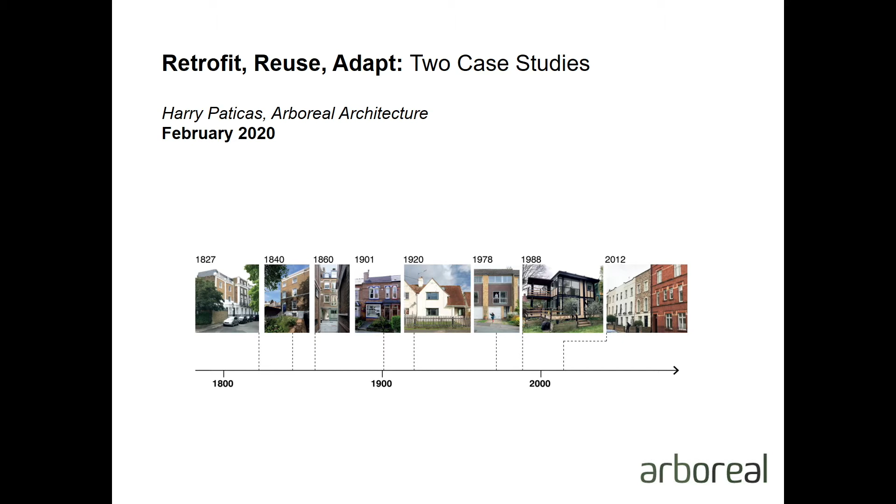So yeah, my practice is arboreal architecture, and for the last 10 years, I've been practicing deep retrofit, which is really a mission to upgrade the thermal performance and operational energy of existing buildings. And in a way, today I'm going to take you on a bit of a journey of my own self-discovery through trying to reach low-carbon solutions for the built environment. So I'm a co-director of arboreal architecture. I'm also a co-director of an organization called 1540. We're a collaborative of architects working on larger projects. I'm also the co-chair of a technical working group for the UK Centre for Moisture in Buildings, and that's on the Retrofit group. I'm a technical expert at the Sustainable Traditional Buildings Alliance, and I do recommend you look up their website and all the resources there, which are very useful.

I'm a RIBA architecture ambassador, and I've been working with schools and teaching children and engaging with schools. And that led to me founding RAFT, which stands for Retrofit Action for Tomorrow, which is a not-for-profit organisation. And I've just started working with the first school in Lewisham, and we are working to make the school zero carbon. It's a very, very exciting project. If anybody's connected to schools, please come and talk to me afterwards. So the other thing is that I'm a DIY retrofitting architect, which means I practice what I preach. And I've spent pretty much every Sunday for the last 3 years retrofitting my own house. So my house is one of the case studies.

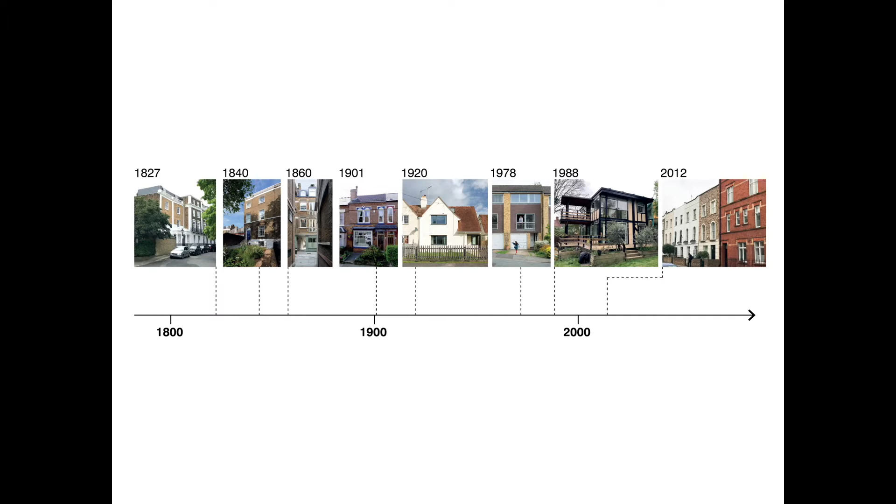So this shows a timeline of various projects that we've worked on. So this is chronological in terms of the types of buildings we've worked on. And really this slide is there to say that a lot of buildings need retrofitting, a lot of different typologies of existing houses, ranging from solid wall listed Georgian houses to cavity wall 1920s semi-detached houses. You'll see the one that says 1988 is a timber frame self-built house. That's one of the Walter Segal houses on Walter's Way. And we're about to start on site a retrofit of that house. And you won't believe it, or probably most of you will believe it, given the performance gap of most modern construction, but we're also working on a retrofit of a 2012 house, which is the one on the right.

So just very briefly, I'm going to introduce 4 projects. It's just 2 slides per project. And it's just to give you an overview of stuff that's actually been achieved in the past. So this is a grade 2 listed semi-detached house.

And we achieved the AECB silver standard, which is 40 kilowatt hours per meter squared for space heat demand, and achieved an air tightness of 2.1 air changes per hour at 50 pascals. So that's pretty good air tightness. It's had a listed interior. We worked with the Conservation Officer and Historic England to achieve that.

This is my mum's house. So again, we achieved the silver standard for this project. And we slightly reduced the level of air tightness, so we didn't tape all joist ends with air tightness tape to reduce leakage at joist ends. And we lost about 1 air change per hour for that. So we sort of started to build up over time a feel for how deep do we need to go, how invasive do we need to be to achieve what result.

This is a passive house, a certified passive house retrofit, EnerPHit, mid-terraced house in West London. And we only just scraped the target value of 1 air change per hour. It's quite challenging when you get down to the lower levels of air tightness on existing buildings. And yeah, that was quite a journey.

We've also worked on this rather wonderful building in the City of London, where we've achieved a pretty similar standard, the AECB silver standard, and just below 3 air changes per hour. That has MVHR. It's actually a 7-story building just next to St. Paul's Cathedral. Very jealous of that project.

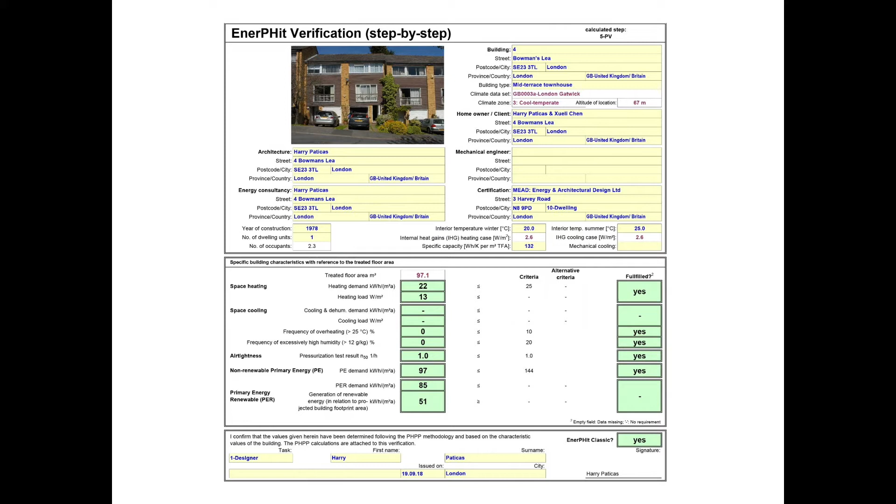So most of the layers of the house were stripped out before we moved in, so we did all the really nasty, dusty stuff before we moved in. This is the EnerPHit verification. Quite complicated to do a step-by-step retrofit using the passive house methodology, but very rewarding and very thorough. So this shows the 5 steps. We're about halfway through step 3.

So what this needed was a very careful management of the building, the different steps we're going to take, the order we're going to take them, the relationships between putting insulation in and windows or ventilation and maintaining good ventilation whilst those works are taking place. So it needed quite a lot of thinking to get this right. And the really great news is that as of today, we're actually performing better than designed in terms of actually measured energy.

So it's very encouraging that PHPP, the Passive House Planning Package, which is a set of Excel spreadsheets, is actually very good at predicting space heat demand in existing buildings.

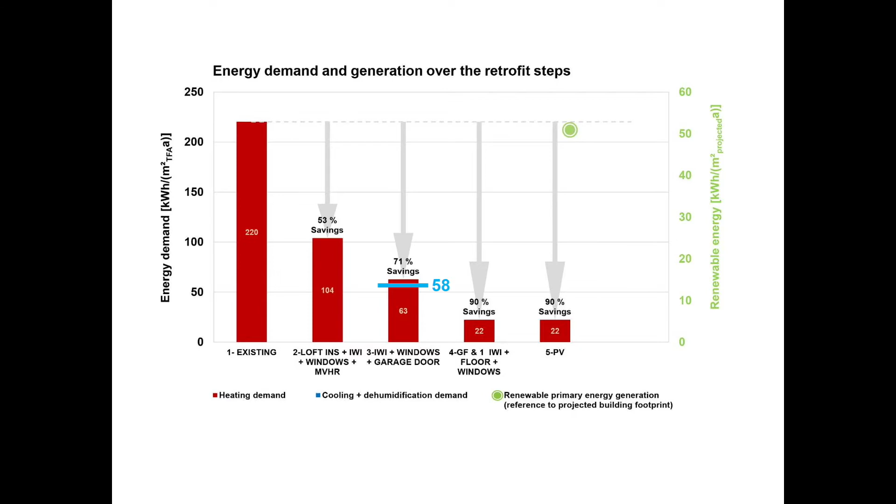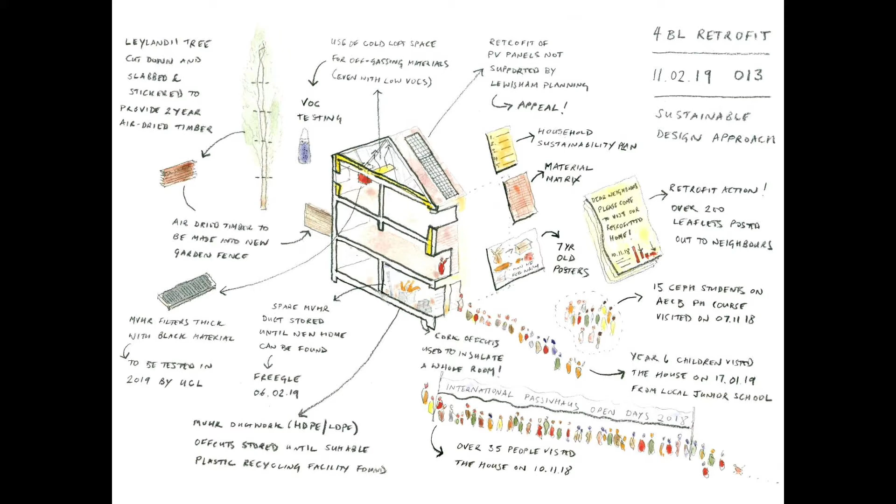And I may open it this summer for International Passive House Open Days if anybody was interested in visiting. And don't expect a grand design, it's just a simple retrofit, but there's lots to see.

We've all been exposed to this type of thinking in our architecture education, but it's very rare that you'll actually see architects looking at the age and the service life of all the elements in the building. So this exercise actually really helps you to understand all the different layers of building and when might you want to put solar PV on, for example, and how does that relate to the existing roof coverings, and might you want to try and coordinate those two. So it's about thinking deeply about the layers of building fabric.

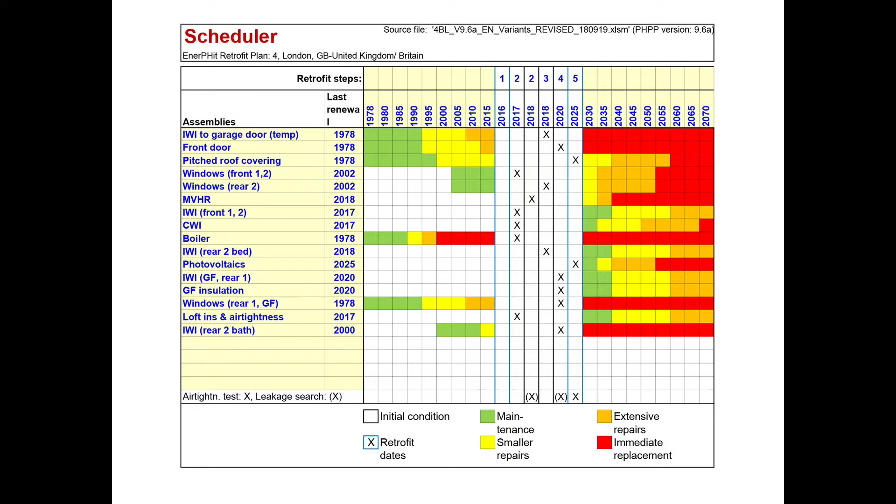So we've installed MVHR, mechanical ventilation with heat recovery. I won't explain how it works. I assume, actually put your hands up if you do understand MVHR, or don't. If you don't, you're welcome to come talk to me afterwards if you want to understand it.

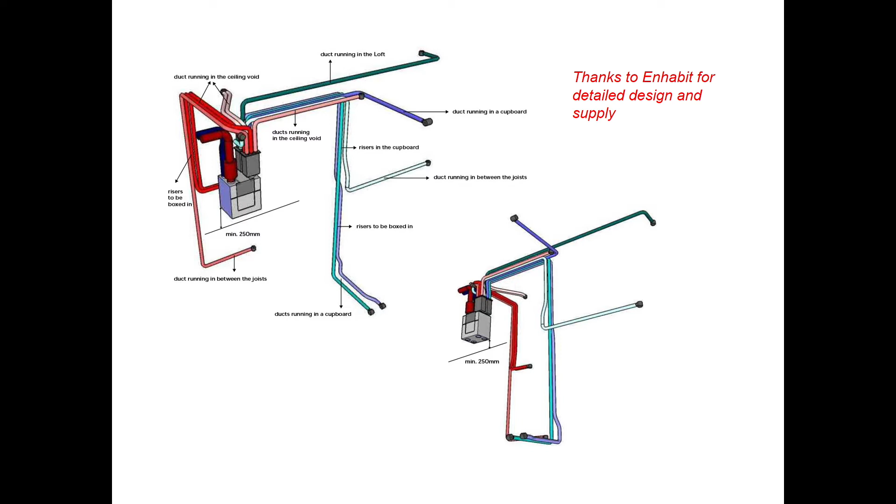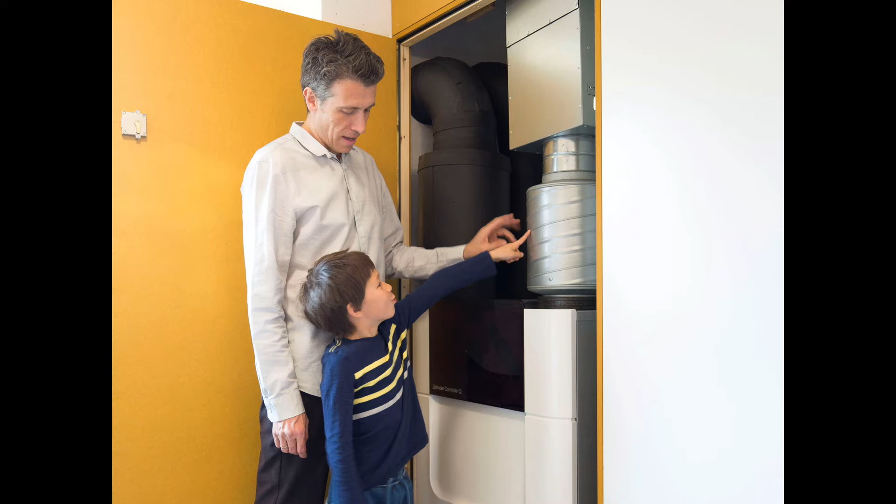And the MVHR is a box that's in his bedroom, and he's actually got really engaged with it, and it's really fun to take out the filters and look how black they are and think about how much dust we're reducing and PM 2.5s are reducing in our house. And when people come to visit, they all love this cupboard and they love looking at the filters and taking them out. And it's interesting how important ventilation is to people. Despite the fact that probably most of you live in houses with too high relative humidity and nasty trickle vents that may or may not be blocked.

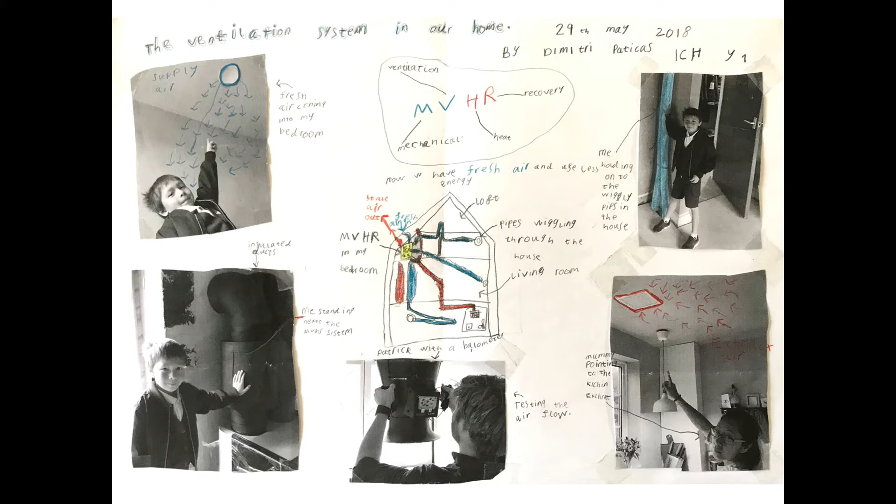So my son produced this lovely poster. His MVHR layout was probably better than anything I could do. And you'll see on the top left, he's showing the fresh air coming into his bedroom, dropping in from the ceiling, and the bottom right is his mum showing the air being extracted through the kitchen, and that has a fleece filter on it to stop any grease getting into the system. So that's before and after. That's what we're stopping coming into our house.

And last summer, during the heat wave, we got these lovely triple glazed inward opening windows that can be opened massively with a flying mullion, and so we get really fantastic nighttime cooling, which is great. But we've been using this AirVisual carbon dioxide and PM 2.5 air quality monitor. This is us taking it on the school run to look at the profile. But we've also been monitoring indoor air quality.

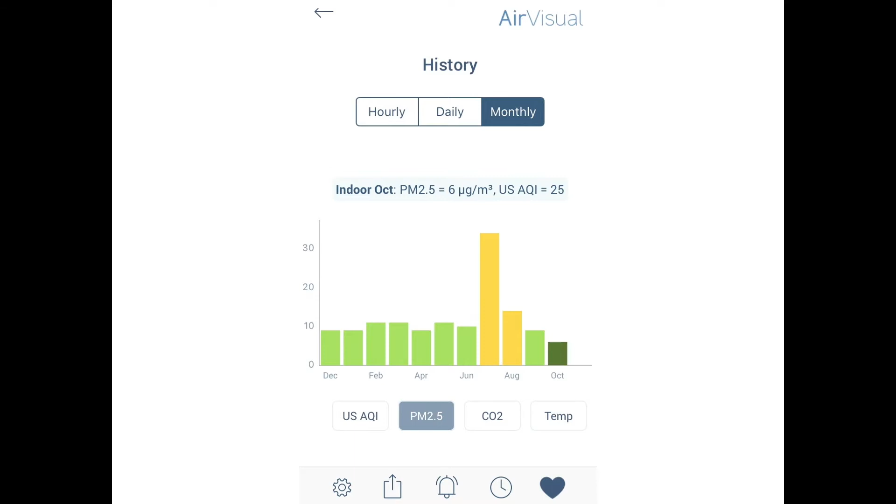And that enormous yellow spike there is when we had the windows open for nighttime cooling. So we had the windows open a lot, and our air quality went down, and that's pretty dramatic, isn't it, to see such a big decrease. Having said that, 30 is still not a terribly high number. It's not dangerous, but it's still worse.

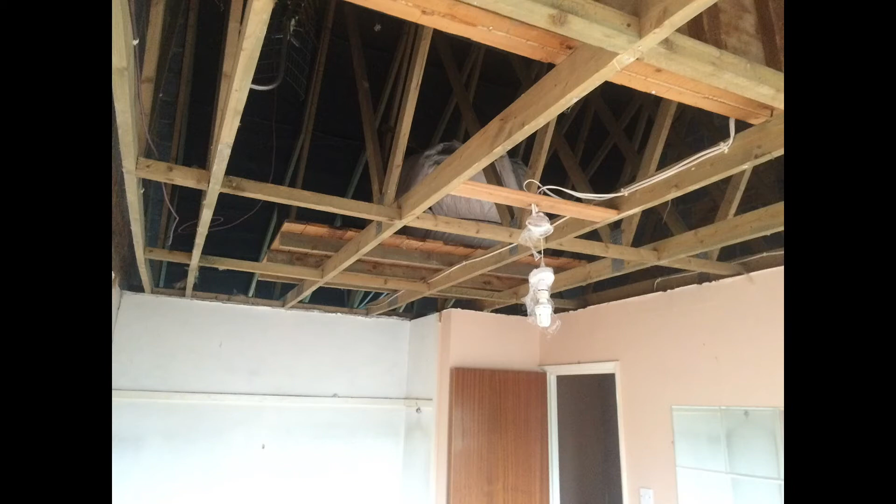That's what the insulation looked like when we opened up the ceilings. That's basically a non-airtight top floor ceiling with holes in it, let's say the electrics for the lighting in the bathroom, and that's just humid air tracking through, being drawn out by wind blowing over the top of the house, pulling warm, moist air, condensing on cold insulation and growing mold. So pretty nasty stuff. So that's what it looked like with the insulation taken out.

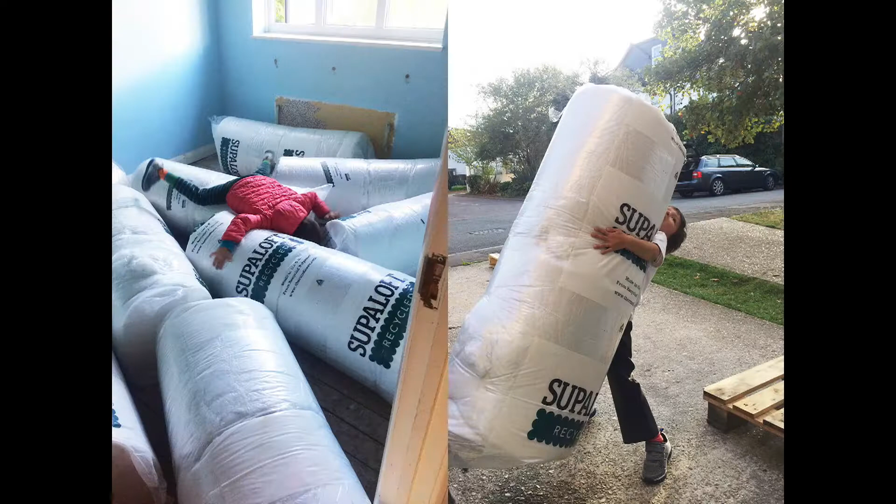And we then put in airtightness boards, total vapor block with taped edges and taped to the walls. So a lot more help from my son, as you can see. So we put 350 mil of insulation in the loft, and this is the Supaloft system, which is very good. I installed it myself.

So we've installed cork insulation. Cork has one of the lowest impacts, carbon impacts of any insulation material. Cellulose is lower. But in terms of sequestration, it's not as good as wood fibre, but it's the lowest impact in terms of getting the material to site. We've installed it as a finish, so we've had a bit of fun with it. So we've done some careful details to manage the moisture profile of the wall.

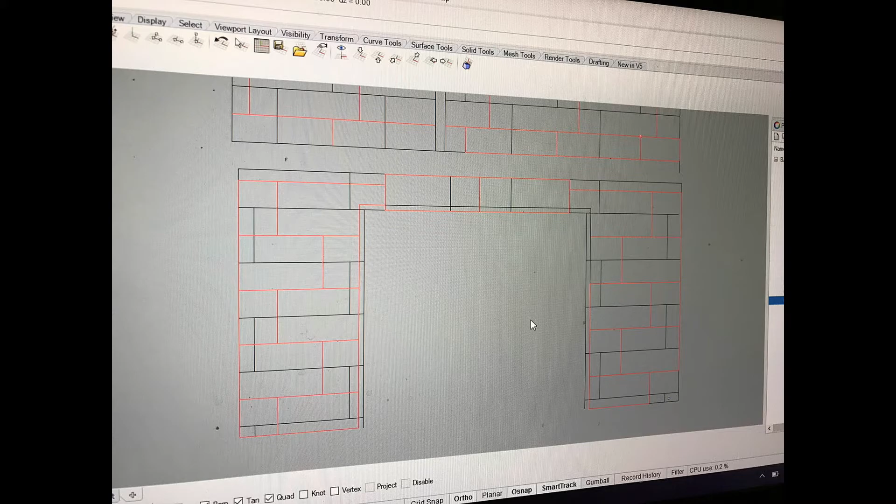But I very carefully laid this out, and I really wish more of this was done. Valuing material, looking after it carefully, not just diving in and starting to cut and making mistakes, but just really valuing all of it. I laid it out on the driveway before I installed it. I saved all of the offcuts of the insulation, and I insulated a whole other wall with them.

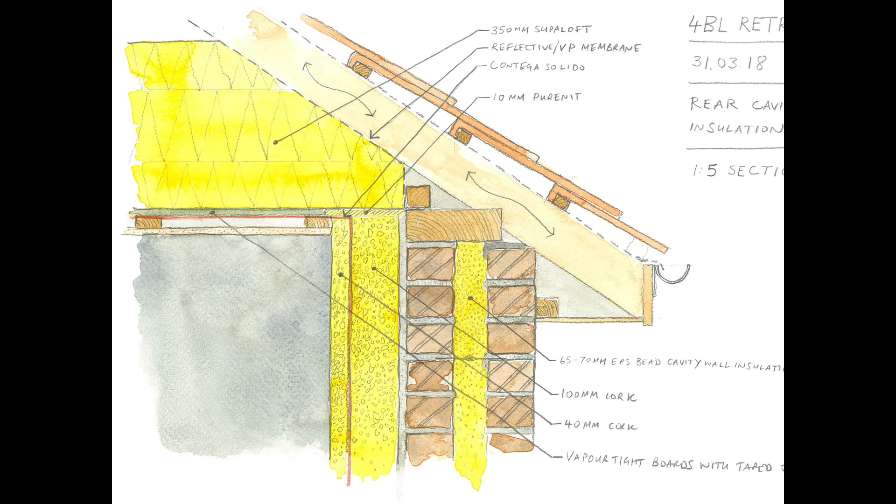So we did a series of watercolors. This is basically me on a Tuesday or Wednesday night preparing for the Sunday's DIY. So I would work out the detail, and then I would be ready on Sunday to execute the detail.

So we overheat in the summer. The whole house as a whole, modeled in PHPP, Passive House Planning Package, doesn't overheat, but the front rooms do overheat. So I wanted to solve this for this summer. I've installed sensors throughout the house, and I've got the whole profile of temperature from last summer, and we're going to better compare it to this summer with solar shading.

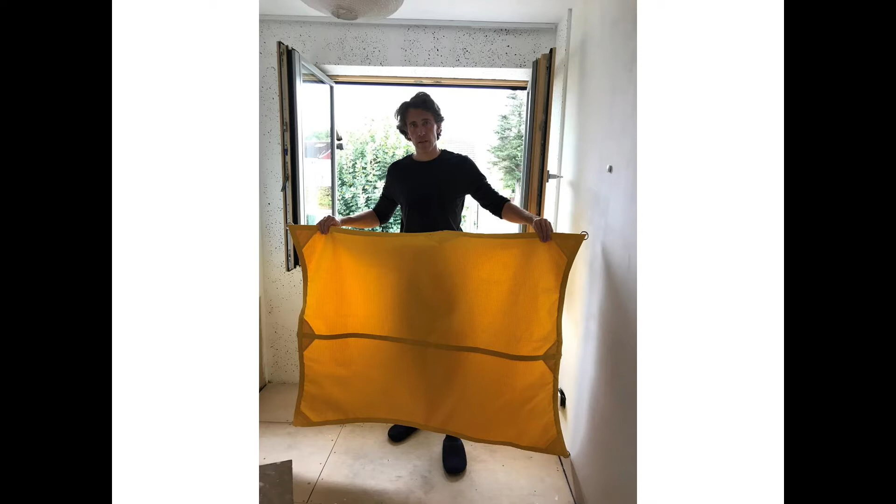Now, I looked at a range of possibilities for solar shading, including electric blinds. A lot of them are actually UPVC. They need electrics, extra scaffolding, they need servicing. What a palaver. External shading needs innovation, and I've come up with a super low-tech solution, which are basically sails. So I'm going to go sailing when it gets very hot.

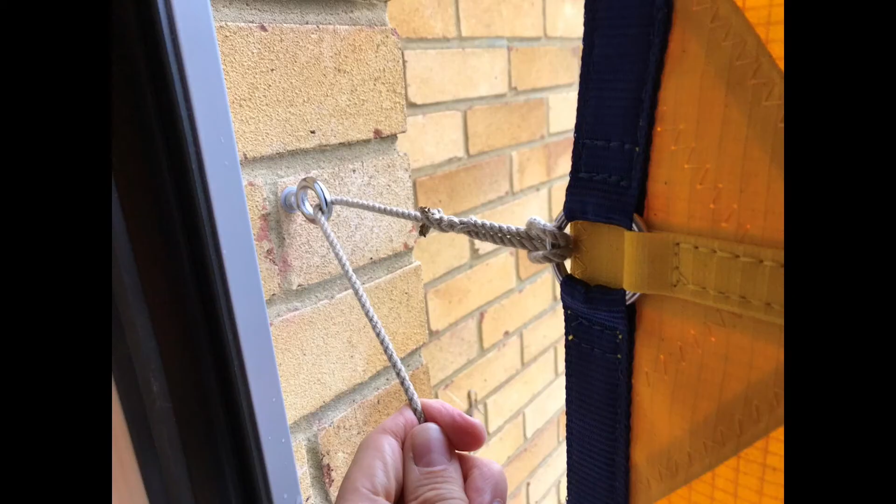So I've been working with a company called Timber Intent, and we've designed these external fixed shades. They've got really, really beautiful detailing. I was told this is one of the best sail makers in the country that made this. So it's stainless steel fixings. So we've got eyes. So I managed to fix all this by hanging out the window in a harness, and no scaffold, super cheap, about £1,500, about £500 per blind.

And basically, when it gets super hot, I'm going to rig these blinds, and they might be up for a couple of weeks, and then when it cools down again, I'll take them down again. So it's a different way of engaging with the building. It's more engaged. I open the windows, up go the sails. Be interested to see what the neighbours think.

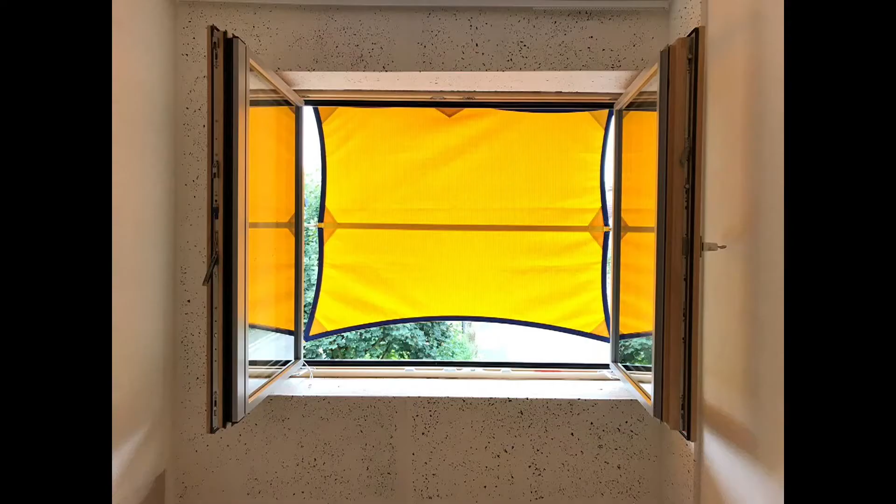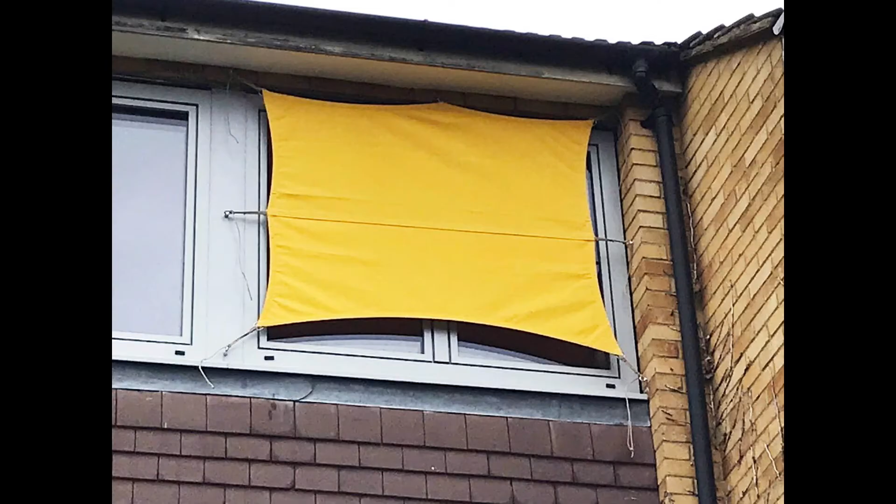You'll see that there's a scallop at the bottom of the window, so that's to see out. When it's sunny, actually a lot of light comes through these, so the ambient light inside is quite nice, and it's a little bit reminiscent of Sir John Soane's museum with all his yellow glass. So that's what they look like from the outside, and obviously I'm looking forward to seeing how effective they are. I'm pretty sure they're going to be very, very effective.

They're also within the plane of the facade, so just in case anybody's wondering about planning permission, they're within the plane of the facade. And I'll take them down if anybody complains.

So this main window is a bit more challenging because I can't reach. So the reason why those blinds work is that I've got inward opening windows, and I can access it and hang it very easily from the inside. Whereas this sliding door, there's a corner that's a bit more tricky to get to, that top right-hand corner of the door. Before I installed the door, I did actually install some lugs at high levels.

So there are 2 metal connectors that were installed, and I didn't know what I was going to design, but I just put them in, and thank God I did, because now I've got something to connect this blind to. So we'll have something like that. And then, of course, I need to reach that corner, and again, I've turned to boat technology. So I've got a boat hook and a mooring hook, so I can just hook that corner on and then hook that corner off. So I made a pole, and I can easily access that corner.

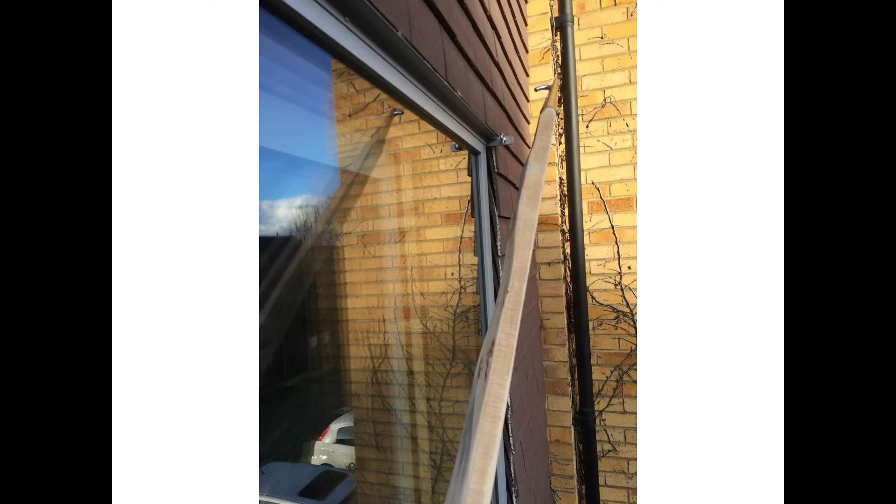So there's a number of sensors in the house. I use the OmniSense HydroTrack system, so they're wireless sensors. I've got some in the first listed building I showed you earlier on. I've got 22 sensors in that building, and they were installed in 2013, and they're still beaming back data and still going fine and giving us all the moisture profiles.

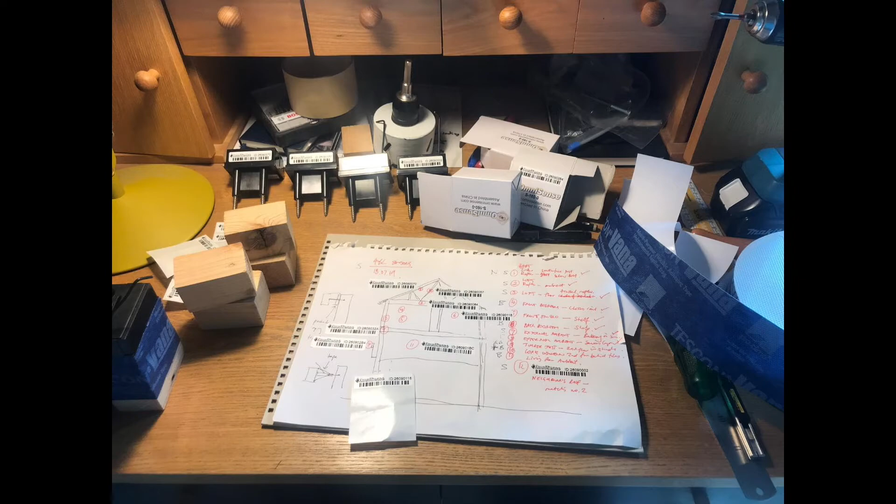So I wanted to do the same for my house, both for the interstitial profiles of the walls, but also for temperature. So I've installed it in the loft. I've installed one in my neighbour's loft, got them in different front rooms. So we're kind of able to then produce data that verifies some of the thinking that we've been having. So that's one of the sensors. They're screwed into a block of wood, which is a block of wood from the house, so I get the actual moisture content of the timber.

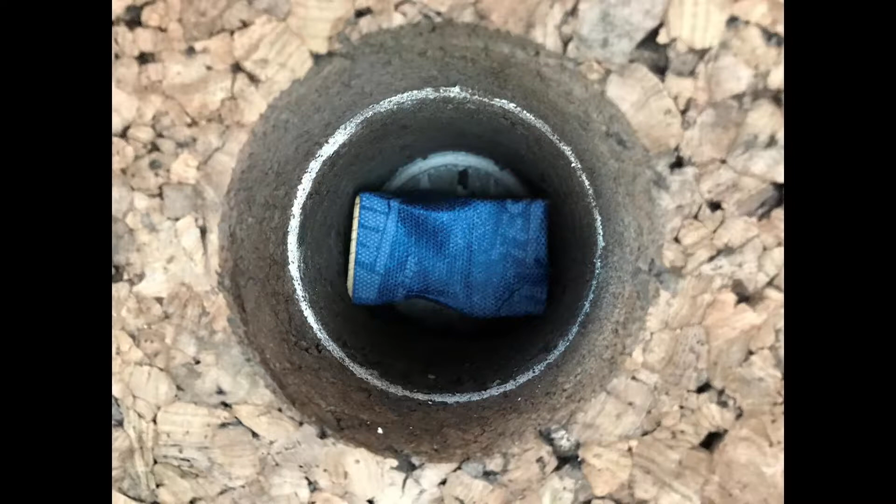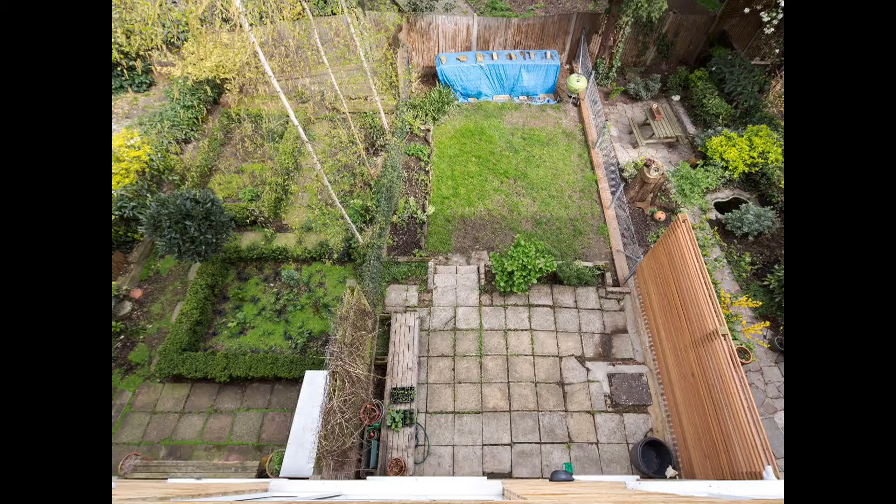So when we bought the house, one of the conditions of sale was that the tree stump, which you can see on the right-hand side, there was a tree there, a giant Leylandii tree. One of the conditions of sale was that was cut down. We cut it down, but I didn't want to lose that material, so we had it slabbed with a mobile chainsaw, and that's what that blue pile is at the back. So that's about 1 meter cubed worth of Leylandii timber, which was air-dried for nearly 3 years, and then this is us taking it down about 2 or 3 months ago. So you can see it's stickered, beautifully air-dried timber, and it's actually rather lovely.

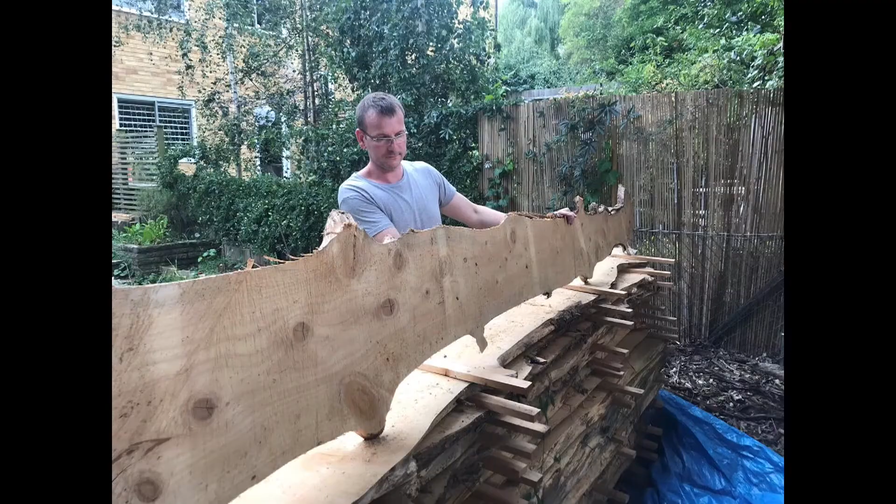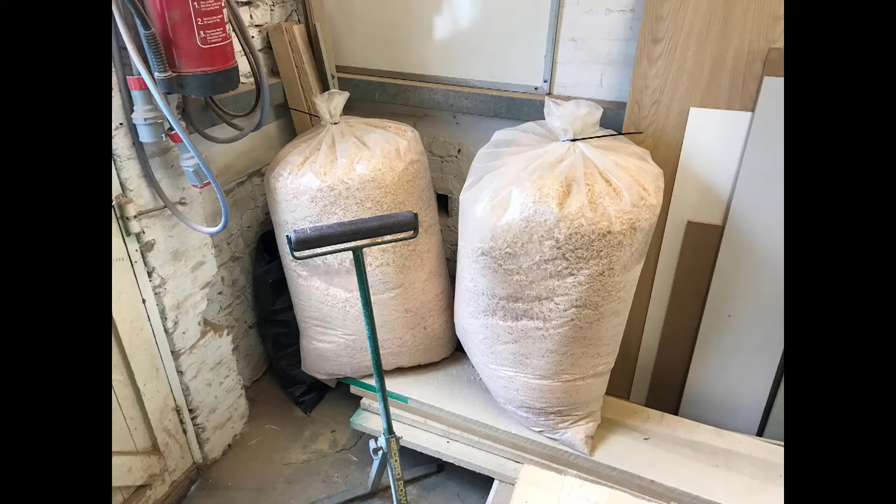And then in terms of materiality, I think when you work more closely with materials, in particular wood, you can start to feel it and look at it, and we decided that we were going to keep this very, very rough texture of the mobile sawmill cutting through. This is chainsaw, and so we've kept that on the top surface, and we'll be adzing in between the planks for a deck. So we're going to make a deck, and we're going to support it on some screws.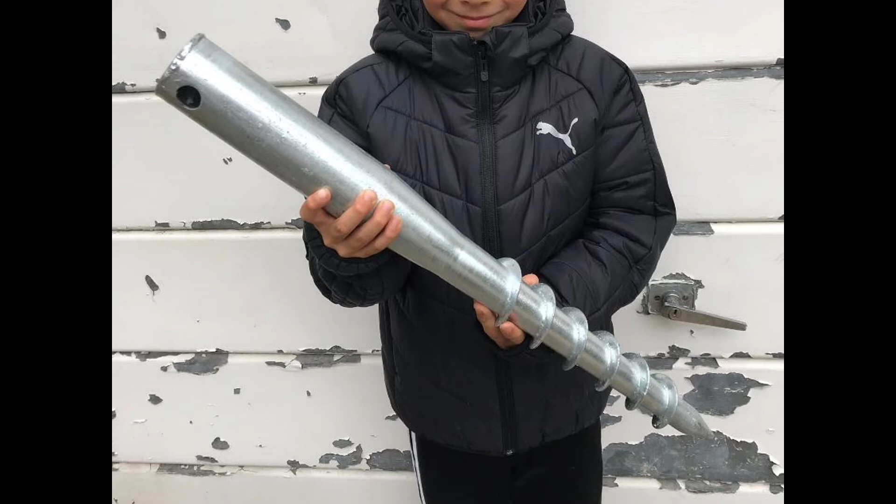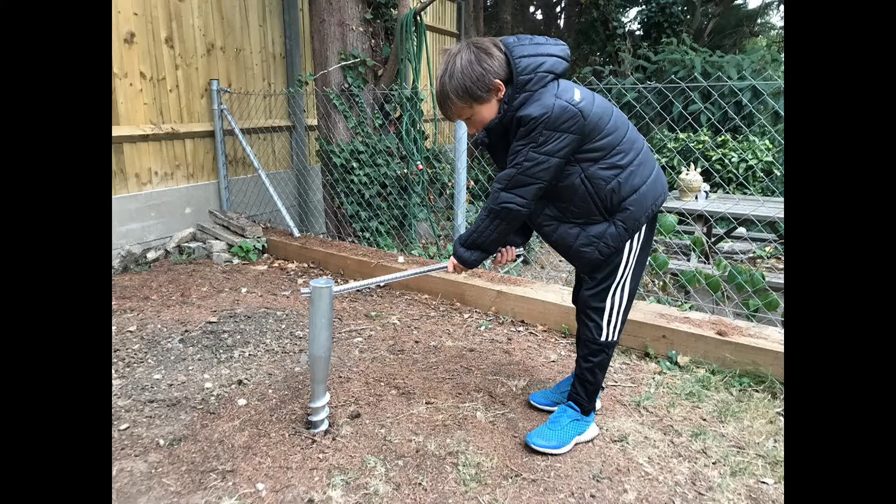So my son holding a screw, big screw. We're drilling holes into the ground. So I just couldn't bear to put concrete in the ground. It's just no way I was going to do that. And we wanted something that would be reasonably long-lasting and very simple to install. So, even an 8-year-old can do this. So we're going to have a lovely deck in the back garden. When it stops raining, I'll put those screws in and construct the deck.

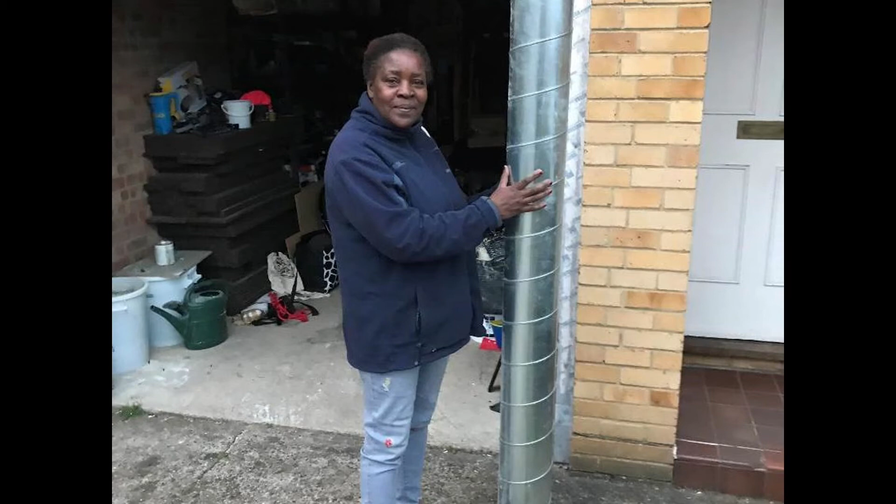So just a very last story about the project. We really didn't want to lose any material from site, and so this is a leftover spiral metal duct that was used for the MVHR, and I free-cycled it, and I don't think that worked, and then I freegled it, and then somebody turned up. Somebody said, "Yeah, I'd love it," and I was great.

So she came round, she was delighted with it, and she put it in her car, and just before she drove off, I said, "Oh, by the way, what are you going to do with it?" And she said, "It's for my new kitchen." I said, "Oh, really? All right, great. Where's your new kitchen?" Uganda.

So 6,500 miles away. So she was, for £15, getting that into a container, and it was going to be delivered to her house in Uganda. And she is building a house in Uganda from FreeCycle and Freegle from London. It's pretty incredible. Right, second case study.

So for a long time, I've been very focused on energy, using passive house methodology and doing deep retrofit. The last few years, I've started to ask the question about what is the embodied energy of the retrofit project. How much carbon are we burping when we create our projects? So this is a case study for a couple in Bournville, just south of Birmingham.

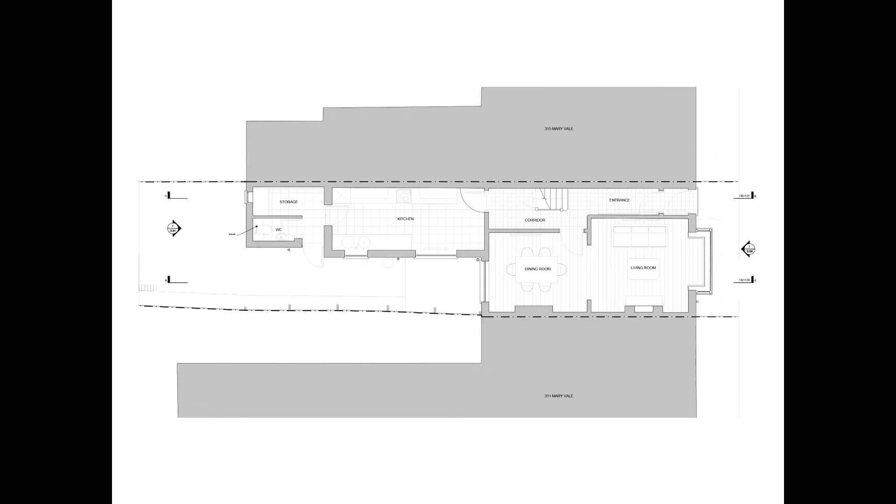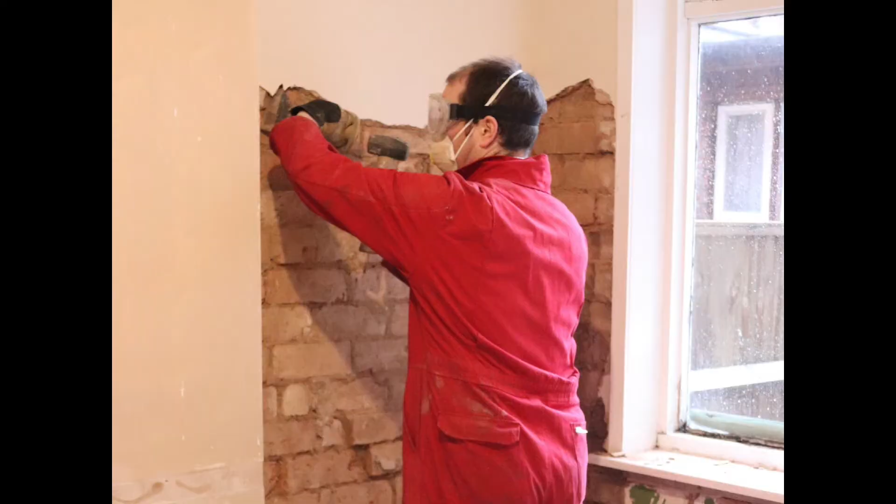How are we doing for time? What's the time now? I don't have a time here.

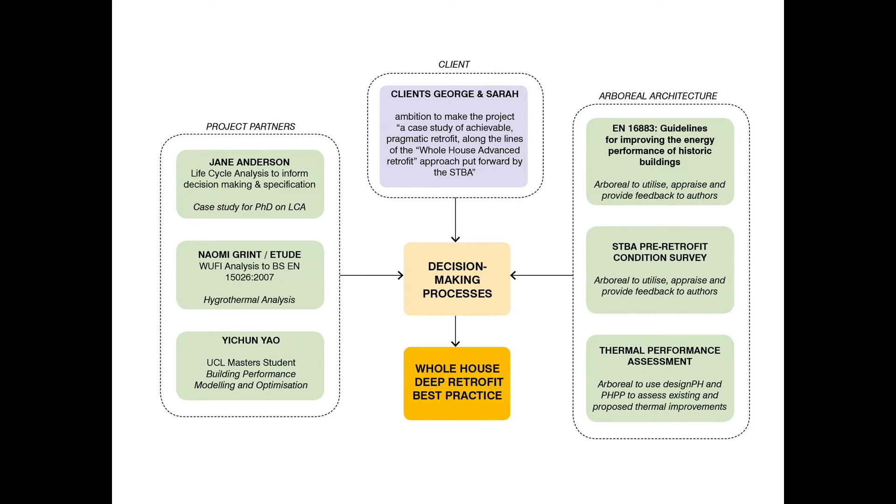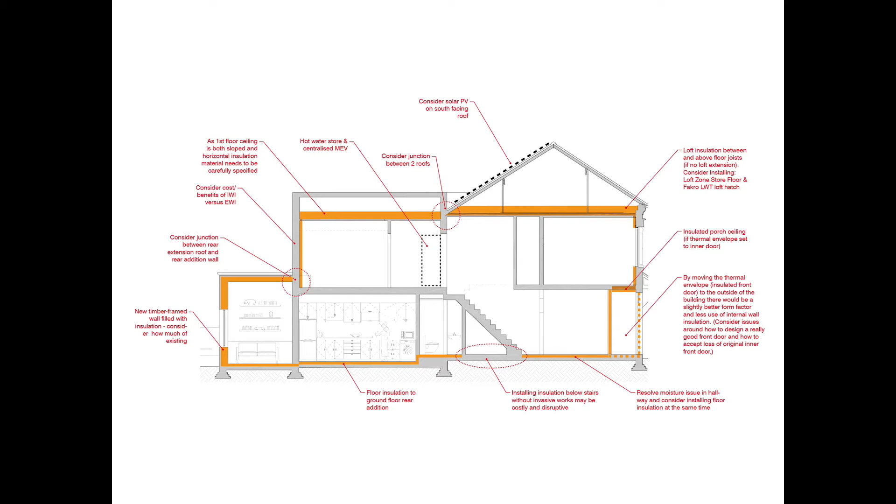This shows the proposed retrofit strategy. So we're looking for thermal continuity. We're looking for air tightness. And you'll see here a hint of the little extension that we've created at the back, which is on the left-hand side of the image.

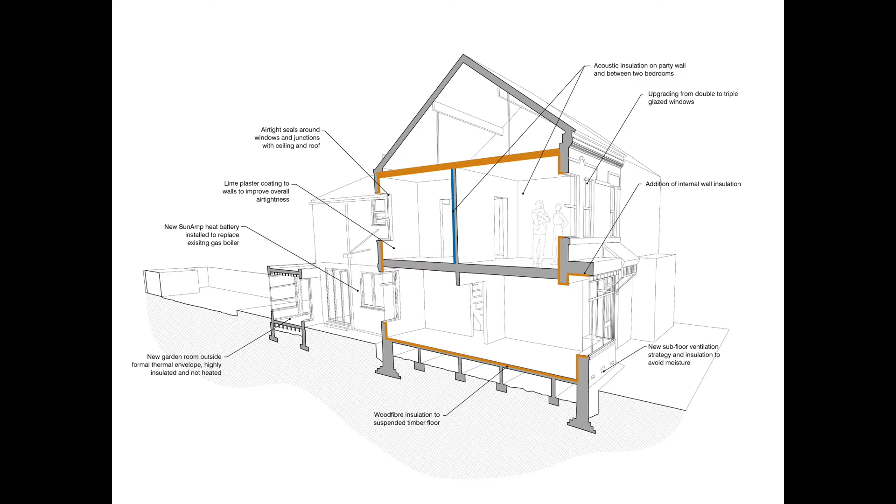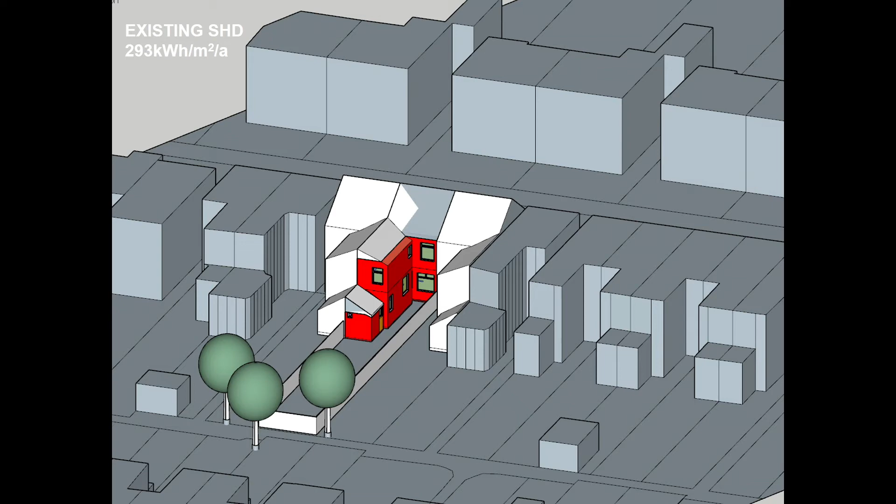And then we model our buildings using Design PH, which is a piece of software produced by the Passive House Institute, which plugs into SketchUp. You might all be familiar with SketchUp, 3D modeling software. So we model geometry in SketchUp, and then we run this software, and we can look at the thermal performance of the house. So this is the existing space heat demand, around 300 kilowatt hours per meter squared per year. And then the proposed, we then model the building again, and this is around 82.

So in terms of the existing and proposed energy required for heating, space heat demand, we're looking at about a 72% reduction. So we're looking at about 80 kilowatt hours per meter squared per year, which is actually double the AECB silver standard, and it's significantly above Passive House. Passive House EnerPHit is 20 or 25 kilowatt hours per meter squared, and Passive House is 15. So we're significantly above those levels.

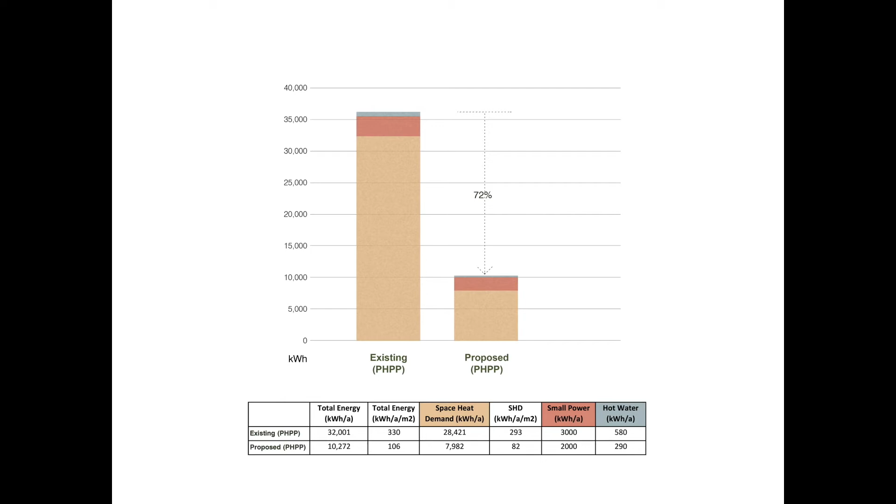But this project wasn't about pushing on energy and insulation. It was about a holistic view in terms of thermal performance, historic character, and carbon. So we're trying to balance those three and being much more conscious about a holistic view.

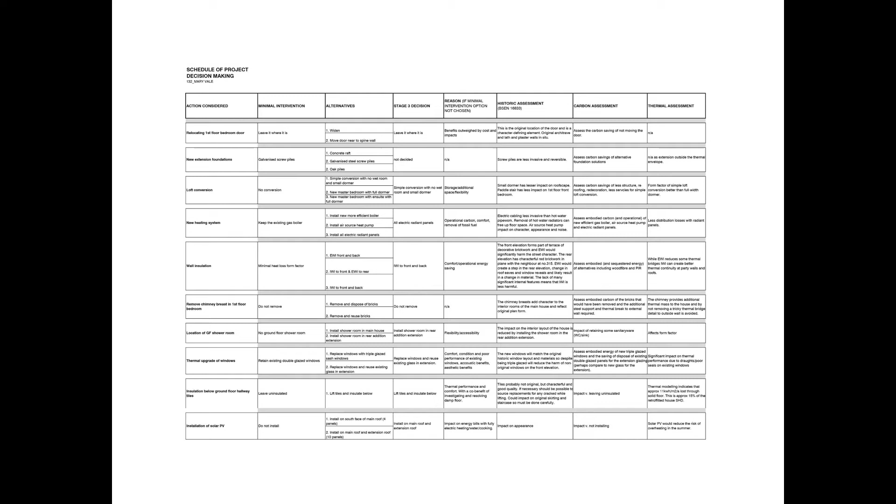So we developed, and I'm not expecting you to read this, there's a couple of details, I'll see you go like that. So we developed a kind of tool, quite dry, but actually very useful, which is a schedule of project decision making. So what we did is, wherever we felt there was a thermal, carbon, or historic fabric moment, as in, what do we do with that?

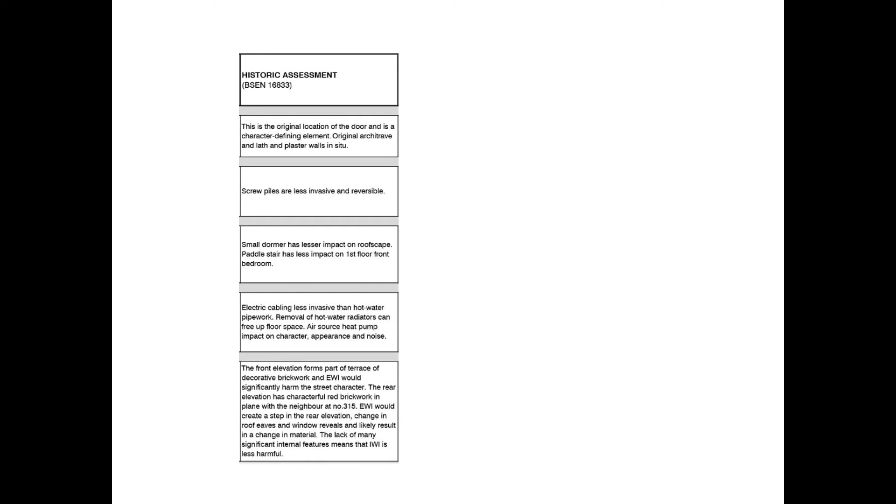We thought, well, let's carry out a rigorous assessment of each measure. So this was about carrying out a historic assessment of that measure. Then we did a carbon assessment of the measure, and then we did a thermal assessment of the measure. And then we tried to find balances.

And there's been a number of moments where we've perhaps pushed the energy a bit harder, and our client, he works in energy, and she is a senior conservator at Historic England. So she's on the kind of historic building fabric side, and we had some moments where there was a kind of dynamic push and pull between how these competing drives are working against each other.

And we worked out that after the retrofit, the beautiful quarry tiled floor, so after insulating the house, the quarry tile floor is going to add about 20 to 25% of the heat loss of the house. Because of course we've insulated the whole house, so suddenly that uninsulated part of the house is really, really losing a lot of heat. And nevertheless, we're not taking it all up and throwing down insulation. We're going to leave it as it is, and they're accepting a cooler space.

We're going to monitor it in terms of moisture, and in a way, the client was very clear about this. They wanted it to be an example of a bit of a compromise that needs to be made in existing buildings, and be representative of the kinds of decisions that, let's say, all of you, when you decide that retrofitting your house is very aspirational and is the right thing to do, then there'll be those moments. And so we're just trying to explore that.

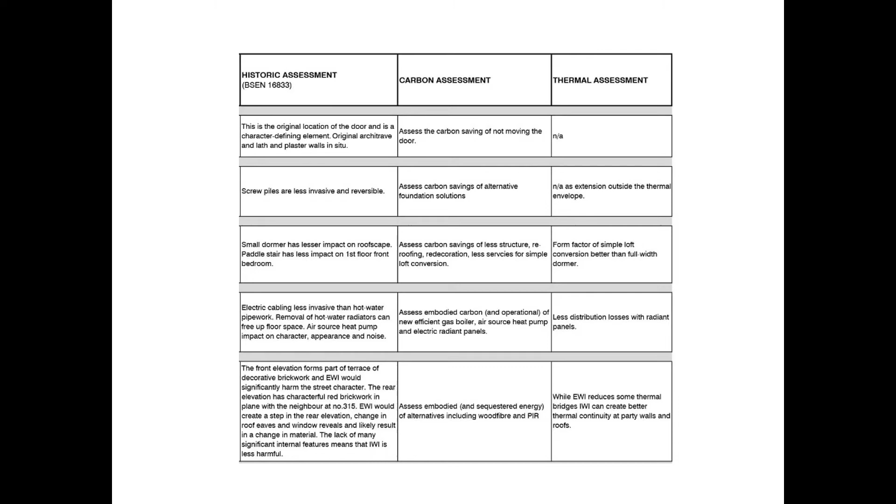So on the left, you'll see that there's a series of actions considered, and then we always said, well, what's the least we can do? Yeah, so we're not maxing out the extension and making the biggest kitchen, dining, living space ever. We're actually trying to do the littlest, smallest, understated intervention we can do on every decision. Yeah, so it's a different mindset. It's not like my great big beautiful architectural dream extension that I'm going to try and get into the magazines.

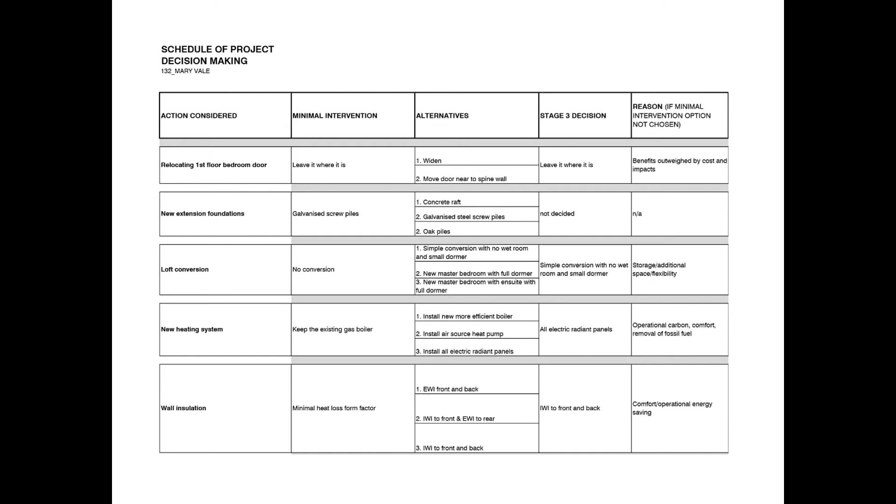It's about how can we minimize carbon? How can we produce a space that's still lovely for our client, delivers what they need to unlock the spatial issues that they're experiencing in the house, but that doesn't blow the budget in terms of an enormous carbon burp.

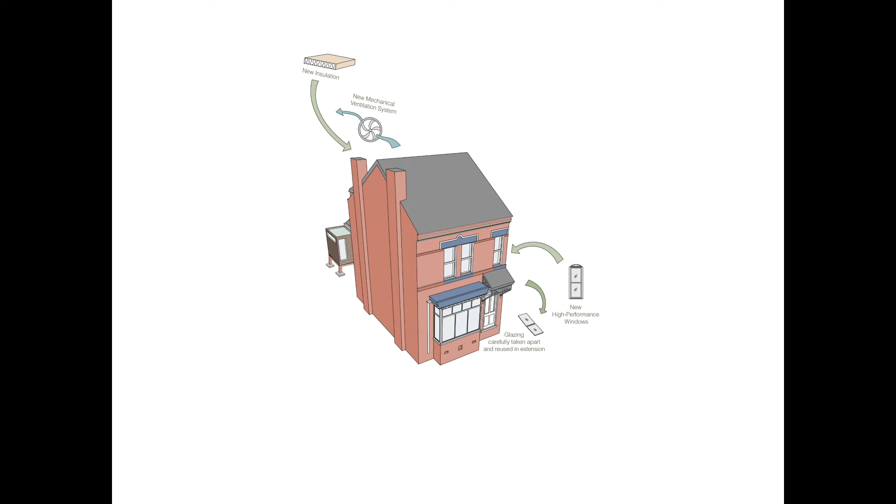So this is a little process diagram of all the things we've done. So we've added insulation, we've added mechanical extract ventilation. We've got new high-performance triple glazed windows, replacing the existing windows. But we've been really careful about recycling the glass, actually reusing the glass. So we produced a schedule of all the glass in the building, and we're actually using it in the extension. So there's a whole series of elements being reclaimed.

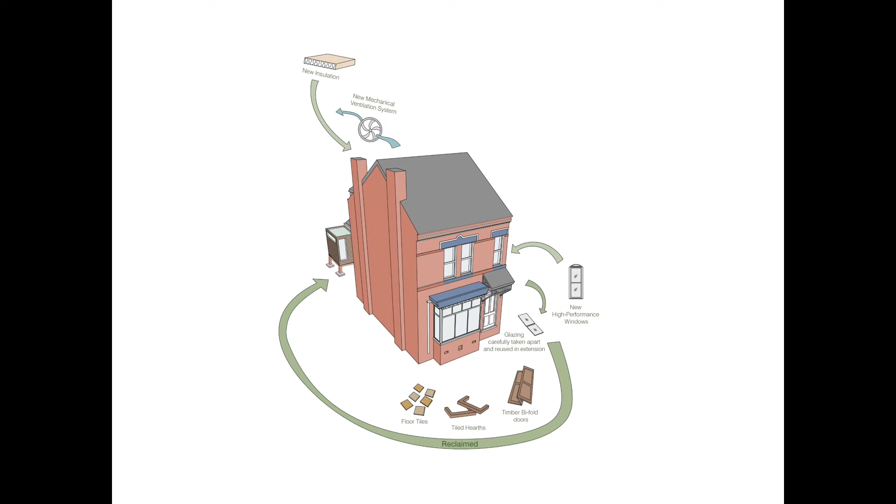And then we're building the extension from locally sourced timber. Big story about foundations, which I'll come to in a bit. We're recycling the window frames. We found a local UPVC recycling center. We're going to be cutting the frames out, and then we're going to be using the glass in the extension. We're reusing bricks.

And then there's a series of recycling and free cycling. This takes time and needs love and effort. It doesn't just happen. We tried to do it on lots of projects. Everybody loses interest. So you have to say up front, if you're going to enter this process, you've actually really got to take it seriously.

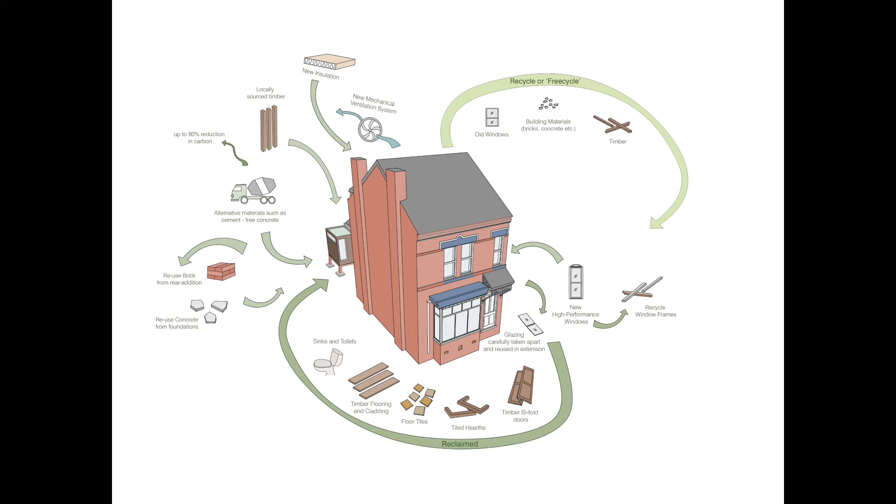So we followed a life cycle analysis approach, working with Jane Anderson. Quite frankly, without her, I would have got lost in this process. It's pretty complicated, pretty detailed. I'm not an expert on it, but I've certainly learnt a lot on this journey.

So now, put your hand up if you know what an EPD is. Not many of you. Stands for an Environmental Product Declaration, and it's a full life cycle analysis of a product. Looks at the whole life impact, carbon, and all the other aspects of producing that material.

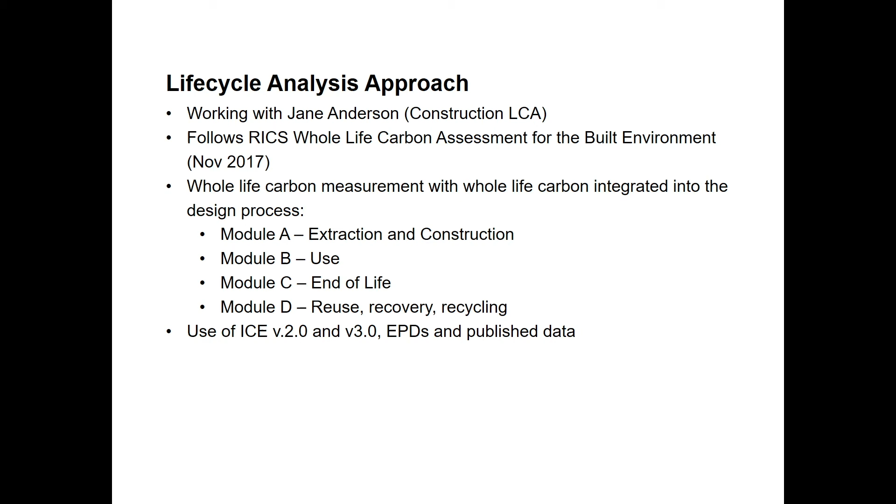So we measured the brick, all the brick in the house, all the insulation that was going in, all the windows, all the timber, and all the other bits. Had a lot of schedules. It's really detailed. I kind of wished it was done in BIM, but then maybe doing it this way has given us a slightly closer feel for the data and for the information. So it's been pretty time consuming.

So basically you need to measure the volume of everything and know the density and the carbon impact of everything, and then you can work things out. It just takes a while.

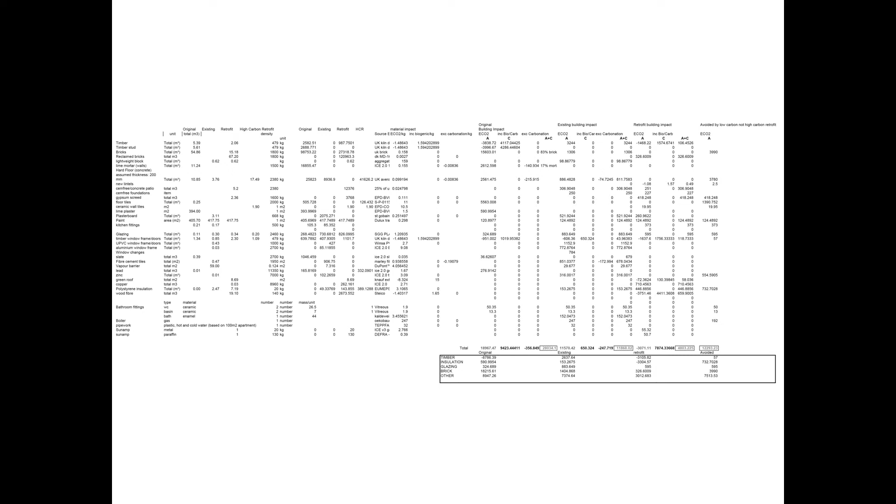So in terms of the scope, we did actually get planning permission and building control approval for a loft extension and solar PV, but that's not happening. So the scope of the study is the ground floor and the first floor, and that's going to happen in 2 building phases with a baby in the middle. So there's the proposed ground floor. You'll see that we've got a very small little bump out extension towards the garden.

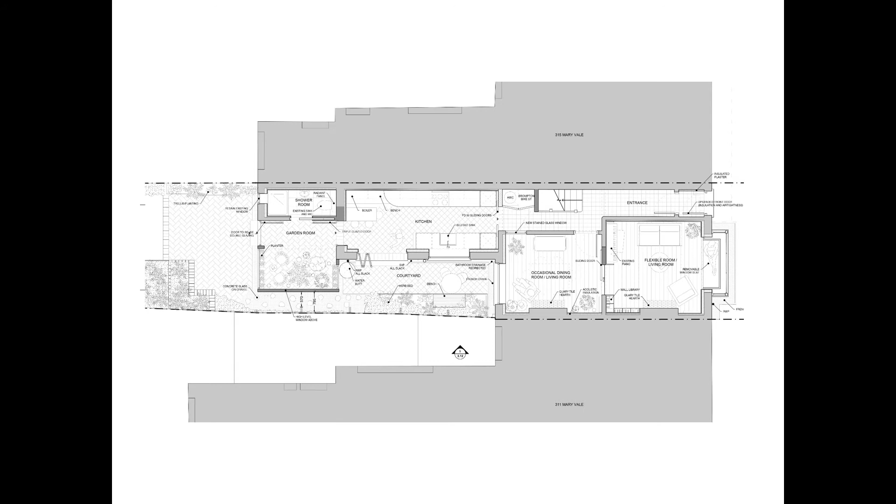And so what we thought it would be helpful to look at in the study would say, okay, well, through that schedule of decision making, can we make it minimal? Can we look at what the avoided carbon might have been? So what might we have done, or what might another architect do using standard construction materials, and then what did we do using a low carbon approach?

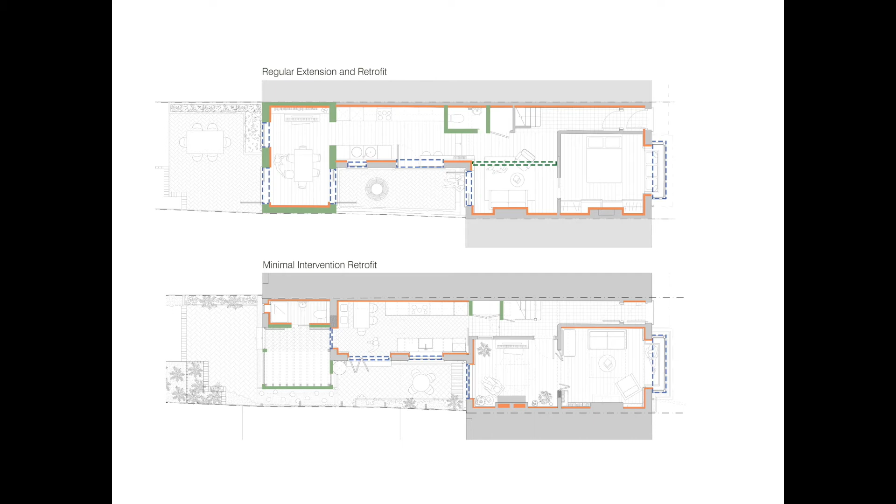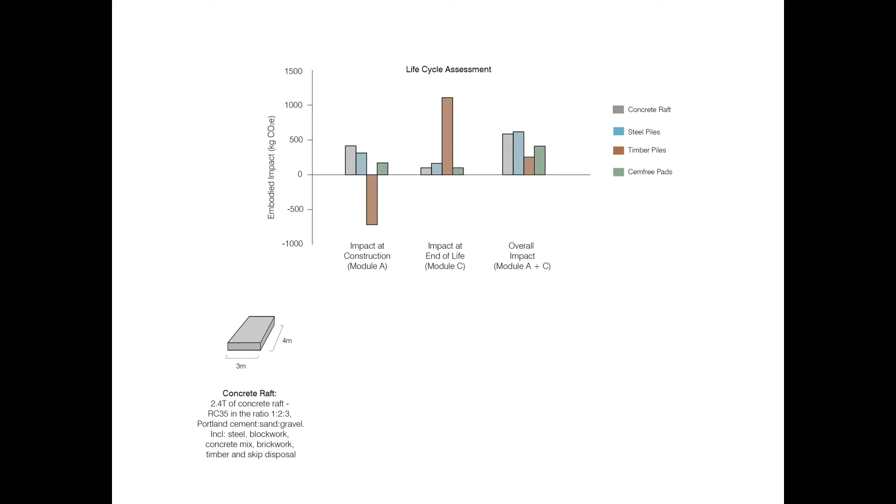So the foundations was completely fascinating, and I think because of time I'm not going to be able to tell the whole story, which is probably a little bit frustrating for you, but what we did is we looked at a concrete raft. So that was the first thing that our engineer came up with. And then we thought, well, hang on a minute. We've still got some concrete of the existing extension. Let's save that, and we'll build off that, and then let's just add a little bit more. So we managed to reduce the size of it.

We then thought, well, what about steel helical screw piles? That's quite low intervention. Still quite high embodied carbon. So if you look on the left, you've got impact at construction, module A. The steel piles are surprisingly near the concrete. That was like, whoa, really? Sort of a bit of a surprise. I thought it would be a lot less.

And then we thought, well, timber piles. Let's do timber piles. Great, but 4-meter long, 300 mil diameter, get them in the house, buildability, not so easy. Could have put something on the ground, something more horizontal like sleepers, insurance issues, general sort of insecurity around that.

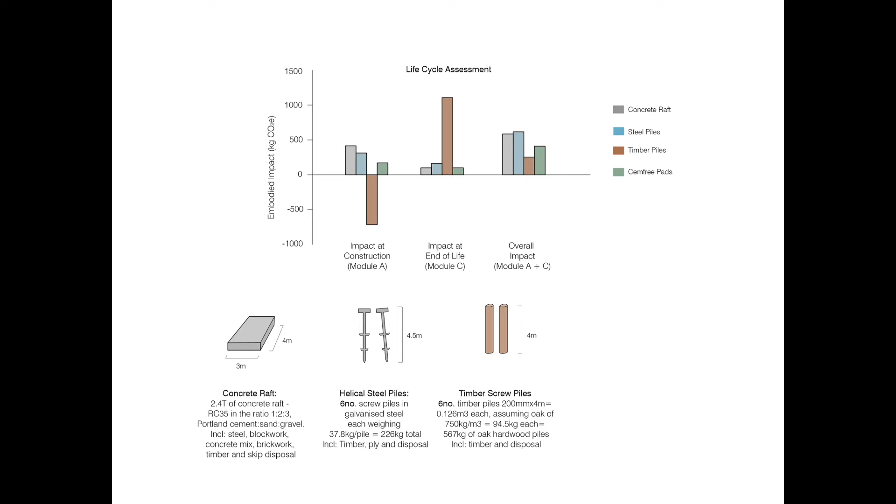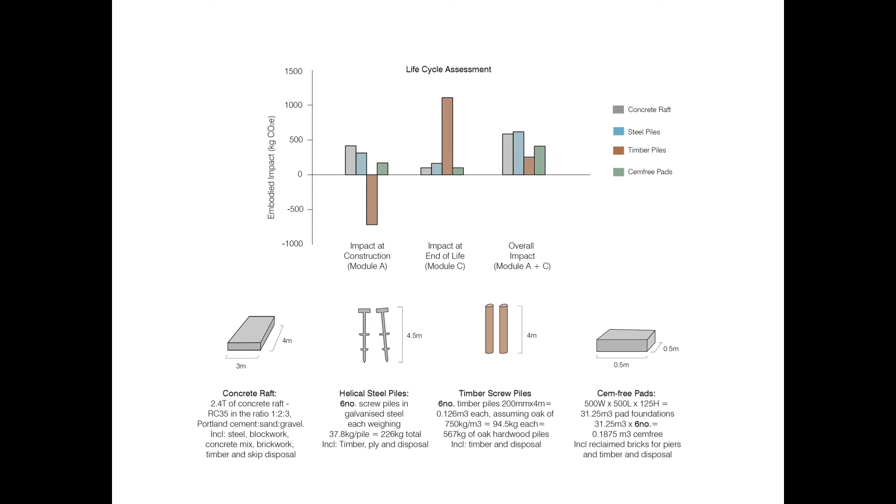So we then went back to very small, cement-free, Cemfree is a product that's out at the moment. People are talking about it. I'm not sure whether we ended up getting an EPD on it, but we did get information that Jane has managed to use and felt was valid enough for the time being. And we ended up getting our engineer to design the tiniest little pads with reused bricks on top of them and doing a little suspended timber floor over the top. And that turned out to be, in the overall impact, module A plus C, higher than timber piles, but still lower than the other two. So it was entering into this process and analysing that we managed to get a lower carbon solution.

And so we've been looking at radiant panels. I suggested it to our client and said, why don't you look at this? Sarah was a little bit skeptical, a little bit dubious, and I said, why don't you get one and try it out? So they bought one, a reconditioned one, and just tried it out for a few months and actually quite liked it. So they are now going to have radiant panels.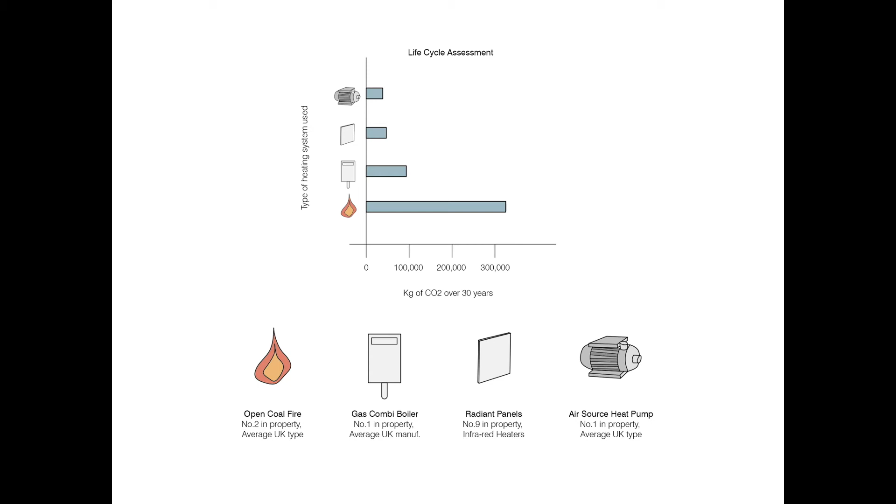And we looked at an air source heat pump. So this looks at life cycle assessment, comparing an open coal fire to a combi boiler to radiant panels and an air source heat pump. We didn't go for the air source heat pump because of the issue of where to put it at the back of the house and acoustic issues.

So we've also looked at insulation materials in very, very fine detail, and that was really a rather fascinating journey. We've got some very interesting, helpful data now on a whole range of materials, and it's pretty obvious that if you use cork or wood fibre and you take account of sequestration, you are locking very large amounts of carbon into your project. It has to be detailed well. It's critical that it's detailed well, but you are locking very high amounts in.

And probably it's worth saying that a lot of insulation products are actually bonded to walls. So there's a plaster, and then it's bonded to a wall. On this project, there are some systems that you can screw straight to brickwork. I like to plaster the brickwork to get the air tightness right and to deal with any potential water ingress through the wall that might then affect insulation.

So I think that lime plastering a brick wall and getting it really plumb, and then fixing wood fibre insulation direct to the wall, getting a really tight, nice, snug fit, but not actually bonding it to the wall, at least gives you the opportunity of taking that insulation away and reusing it potentially in the future, rather than it having to be broken off the wall, which is what happens when it's bonded to the wall.

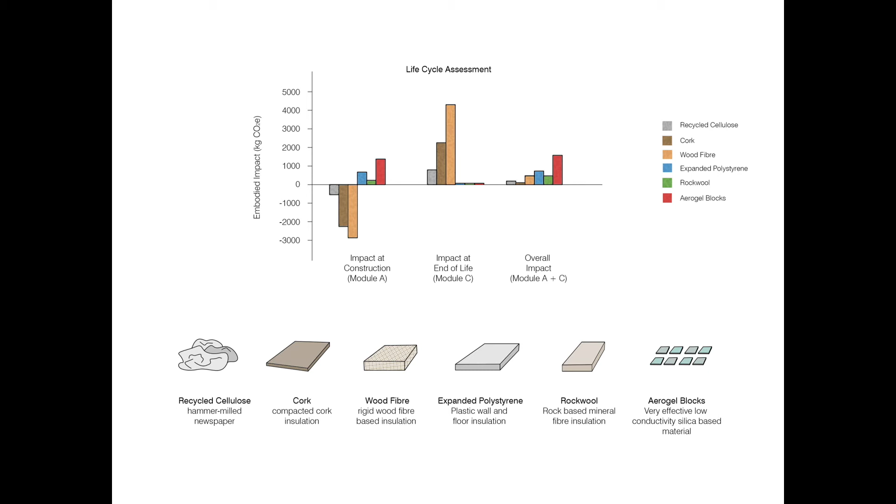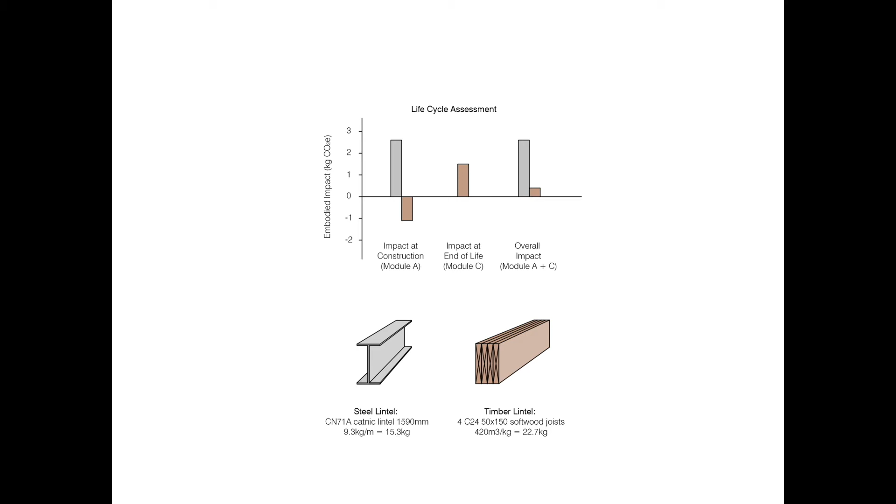So we also wanted to compare a standard steel lintel to a timber lintel. We just wanted to see, well, what is the difference? It's pretty huge. It's at least 4 times more carbon in a steel lintel than a timber lintel.

So back to this graph. I just got really fascinated in this history of a building, that it goes through coal, timber, coke, open fires. It goes into a period of poorly performing gas boilers, slightly better gas boilers, condensing gas boilers, and then suddenly now we're at this stage where a whole range of new technologies are opening up.

And the big question was, we're going to do a retrofit now. There's a climate emergency. We are looking at a very, very bleak future. Should we be releasing carbon into the atmosphere now? We've got to sort this mess out as soon as possible. So what kind of intervention are we going to make?

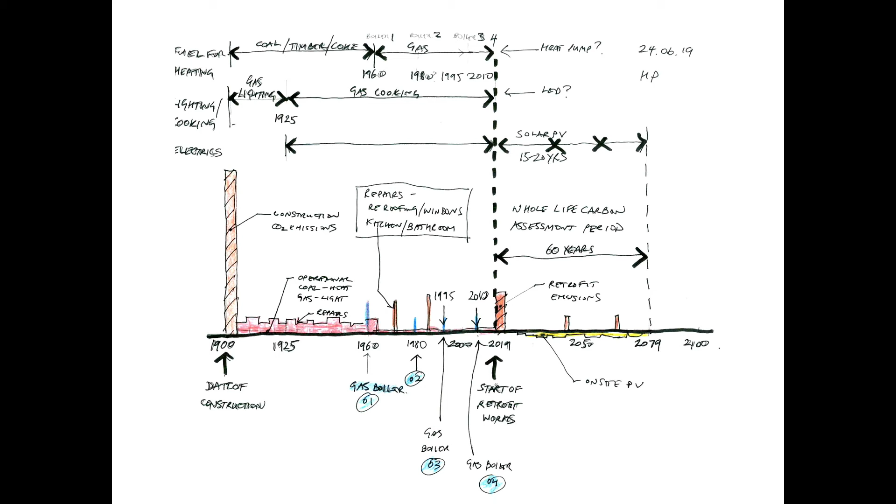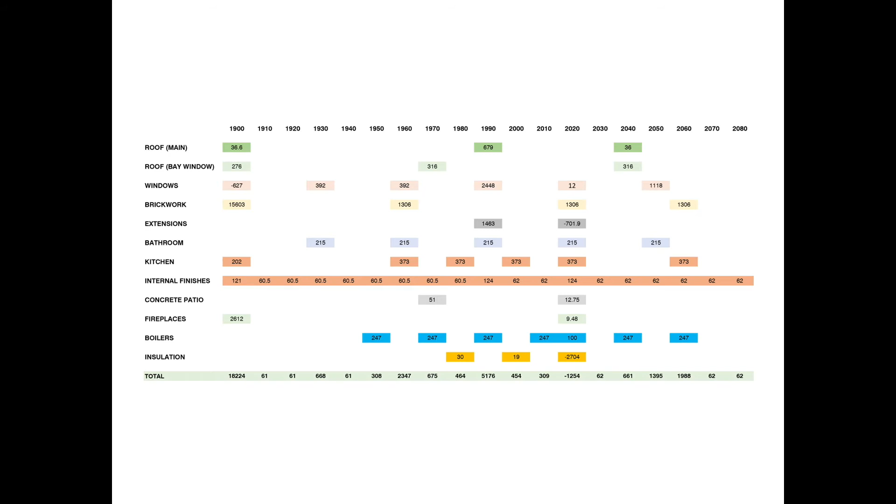So in order to quantify this drawing, I produced this schedule of building elements and then tried to look at the frequency of repair and frequency of intervention on each one. And then Jane has added carbon impact to those numbers. So that's helped us actually quantify it. And funnily enough, the graph doesn't look that different to what I drew initially. So this is a properly quantified version of it.

And so on the left, you can see the emissions on construction. So that's tons of carbon. And you can see a whole series of interventions through its project life. Obviously, this is speculative. We know some of it, but not all of it. And then you've got 2020, this moment now where we're going to be retrofitting.

So overlaying that is just a look at the carbon content of the operational energy. I mean, if you look at the carbon emissions of the coal burning back in the day, and then of course now we're looking at rapid decarbonisation of the grid. We're looking at producing all our heat from radiant panels and our hot water.

We're going to be using something called a Sunamp, which is a heat battery. So it's a very small device, looks very, very promising. And then our client isn't currently installing PV, but that may come in the future. And I have to say that I'm a little bit skeptical about the carbon emissions of PV. A lot of stories have changed over time, over the years.

And Jane looked at the carbon content of PV. I haven't put this on the slides because I don't know about this yet. You go to any PV supplier and they say you save carbon immediately, but you don't. There's a pretty large carbon burp at the start of producing those panels. And I'm not sure how much. It very, very much depends on where it comes from, who makes it, and how they make it.

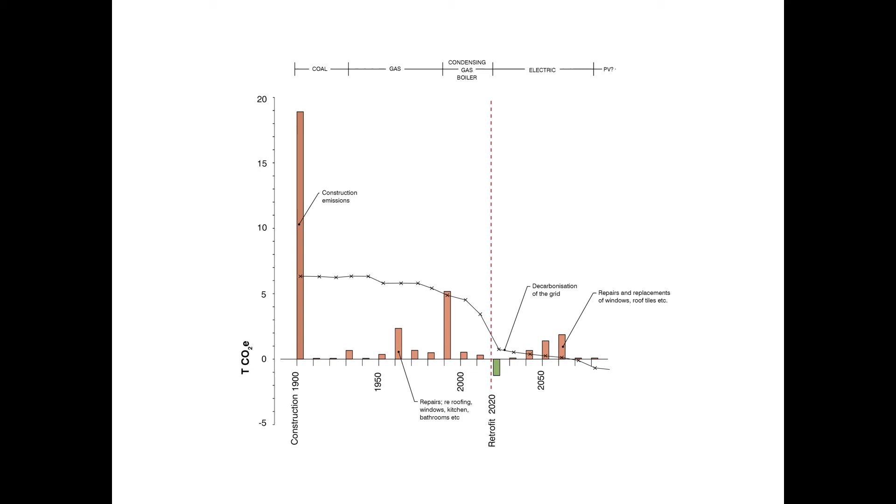So all I urge you to take from this comment is that where something comes from, how it gets to you and how it's made is critical. So, for example, some Norwegian panels were significantly lower carbon. There's something called a solar scorecard that is a very useful measure of the impact of solar panels, and I think that's really worth looking at.

So you remember this graph. So we've looked at what was the original construction. So this is just module A, so basically the carbon emissions of producing the building, the stuff. And basically you'll see that our retrofit is carbon negative. It's because we got so much wood and wood fibre. I was really surprised. I just didn't think it would be like this. I really thought we must be 2 or 3 tons. But when you look at sequestration, it's actually carbon negative. The standard retrofit was about 12 tons.

So the take home from this is that significant reductions of carbon can be made through initial layout decision making, through very careful specification, and through a really strong desire to find good homes and keep these materials circular, keep them flowing.

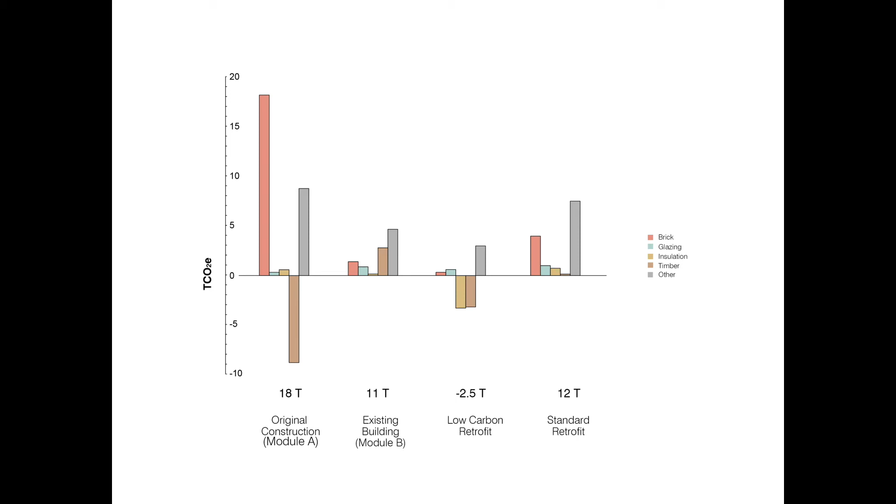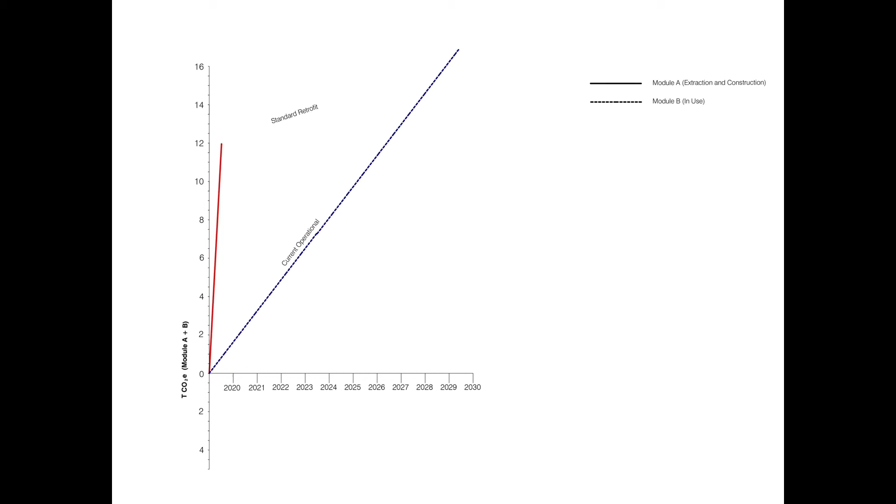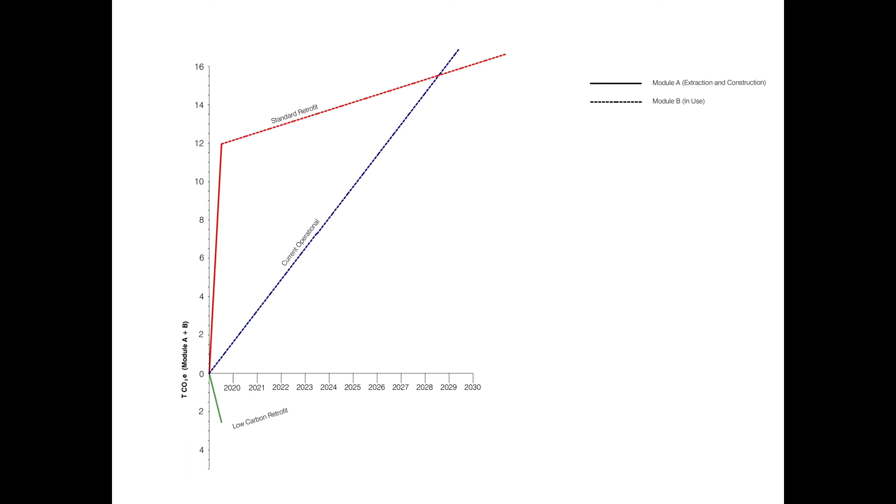So back to the graph that I speculated on. So there's our current operational energy. So this is actually operational carbon. So this is if we just left the building as it was. That's what's going to happen. If we did a standard retrofit, that would be our carbon burp. That's 3 months worth of construction, about a 12-ton burp. Then we would have had that kind of operational energy. In fact, we've done that, and we're going to have that.

So we've got a pretty massive avoided carbon impact. Okay, so that's the end of the case study. Any questions on it, feel free to ask me afterwards. We might have some questions now.

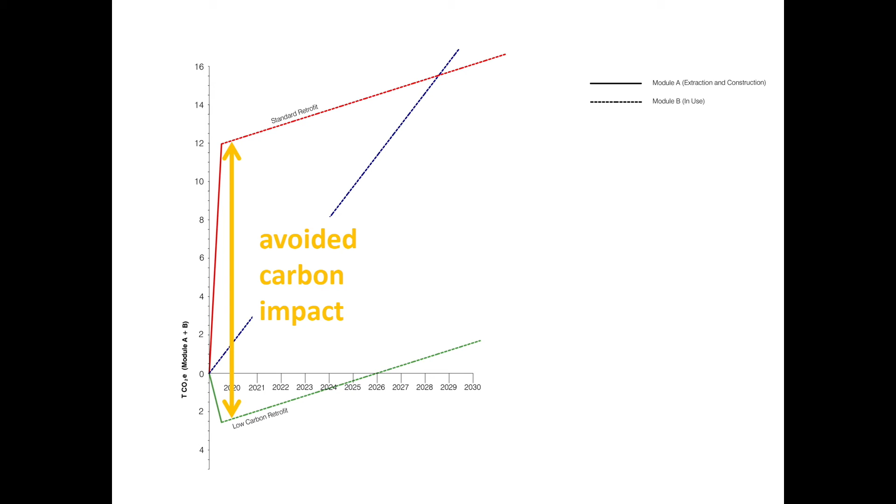I've got a very quick thing, which is, I just want to tell you about RAFT, which is Retrofit Action for Tomorrow. It's a not-for-profit, and I'm working with schools with a program where I engage the children and the teachers and the entire school community, teaching them about building performance, about the climate emergency, about the circular economy.

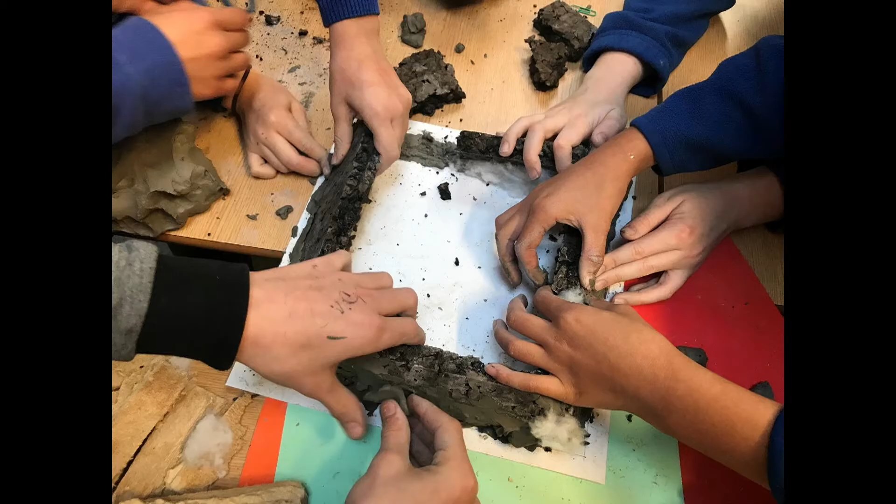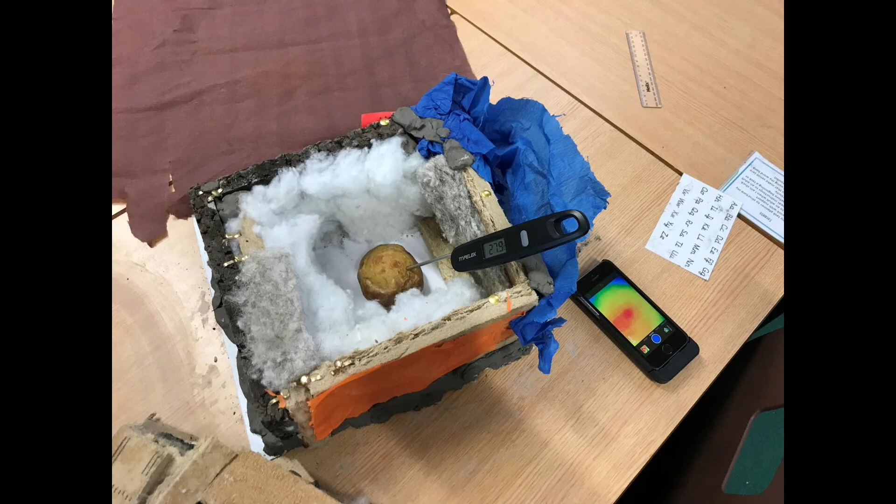We've been making models, so we've got something called the Baked Potato Challenge, where I get them to insulate a baked potato with natural insulation materials, and then they learn about thermal continuity and building performance. We then use a thermographic camera and analyze them and see which one kept the heat for as long as possible. And I'm in the process of producing a zero carbon retrofit plan for this school.

And then my last point is that this was a petition that I started before there was a general election. It's since been shelved because that's what happens to petitions. It only got to about 4,000 names despite telling everybody in the world about it. I think that one of the most significant impacts we can make on stimulating a low-carbon, deep retrofit market is to try and get a 0% VAT rate on retrofit works. And I think it's really, really important, and I'd be very grateful if you could share that message to people.

Government are always saying, how can we reduce the cost of retrofit? Well, this is the answer. This is 20%. This is the difference between a deep retrofit and just an extension. You know, it really is a very big opportunity. Okay, thank you very much. Thank you, Harry.

That last point about VAT is a huge one, and I'm glad to say that I did sign your petition. I was surprised that more people didn't, because it's obvious. The Green Party had it as part of their manifesto to do something about the VAT on retrofit, because obviously the point is, if you're doing new build, it's zero rated, and so we're actively encouraged to demolish at the moment. Harry, that was an amazing presentation.